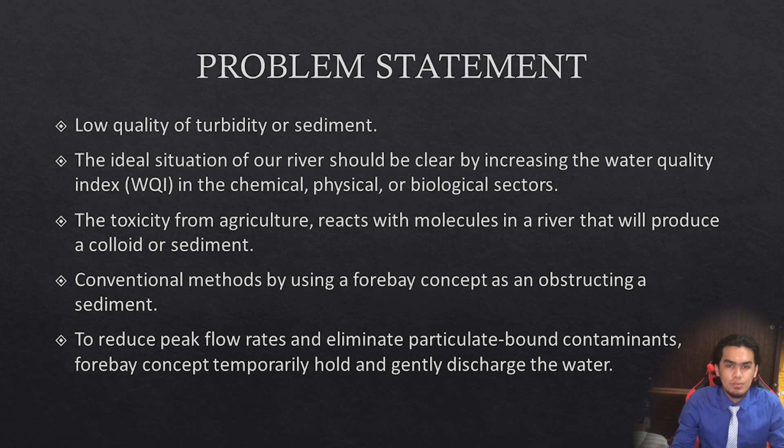To reduce peak flow rates and eliminate particulate-bound contaminants, the Forebay concept temporarily holds and gently discharges the water, which has a permanent pool of water to promote sedimentation and provides additional storage capacity above the permanent pool to detain and slowly release stormwater runoff, thereby mitigating peak flow rates.

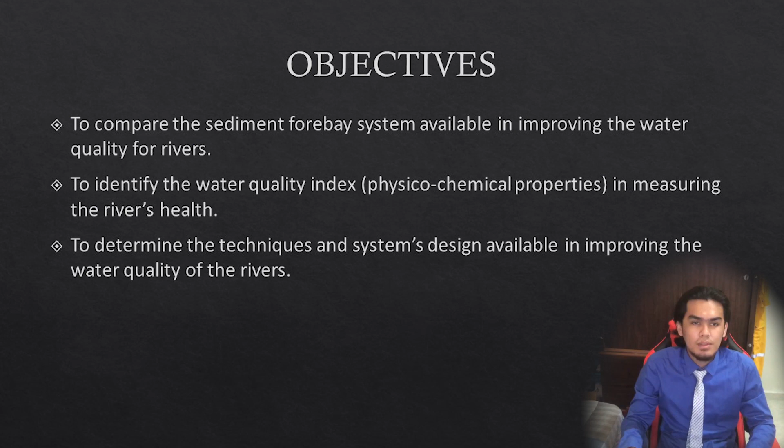There are three objectives in the study, which are to compare the sediment Forebay systems available in improving the water quality for rivers, to identify the water quality index physico-chemical properties in measuring the river's health, and lastly, to determine the techniques and system designs available in improving the water quality of the rivers.

The research questions of this study are how the Forebay system works to improve water quality, what are the advantages and disadvantages of Forebay treatment, what techniques are used to determine water quality, what physico-chemical properties determine the water quality index, and lastly, what is the impact on the ecosystem due to low water quality.

Now, we continue to the literature review. For application of Forebay systems, a Forebay is a man-made waterway in front of a bigger body of water. Forebays serve a variety of purposes. For example, they are used in flood management to function as a backstop during floods or weather conditions, detaining water and discharging it into a bigger body of water in a controlled manner. Several Forebays are mainly utilized to provide a natural environment for plants and wildlife to offset the dam or reservoirs' environmental effect. The size of Forebays varies substantially depending on their location and use.

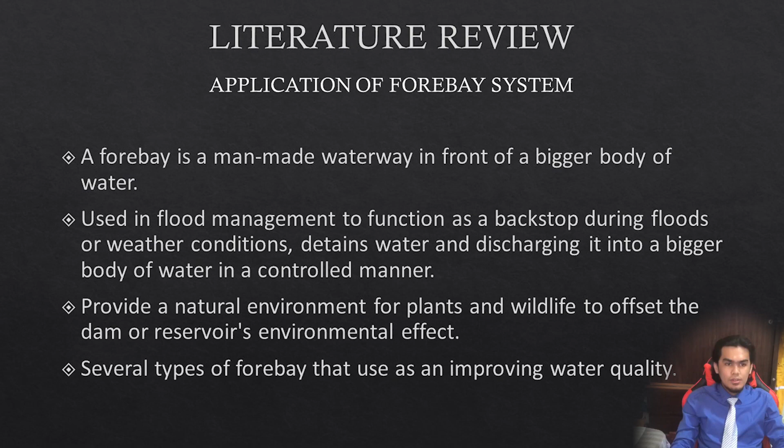In this review study, there are several types of Forebay used for improving water quality. Firstly is the wet retention pond. For several water pollutants, the effectiveness of urban wet retention ponds has been widely examined. To reduce peak flow rates and eliminate particulate-bound contaminants, wet retention ponds temporarily hold and gently discharge rainwater.

Wet retention pond, on the other hand, with sandy underlying soils, may give extra advantages via infiltration, recharging groundwater and maintaining stream baseflow. It contains a permanent water pool to promote sedimentation and extra storage capacity above the permanent pool to hold and gently release stormwater runoff, hence reducing peak flow rates.

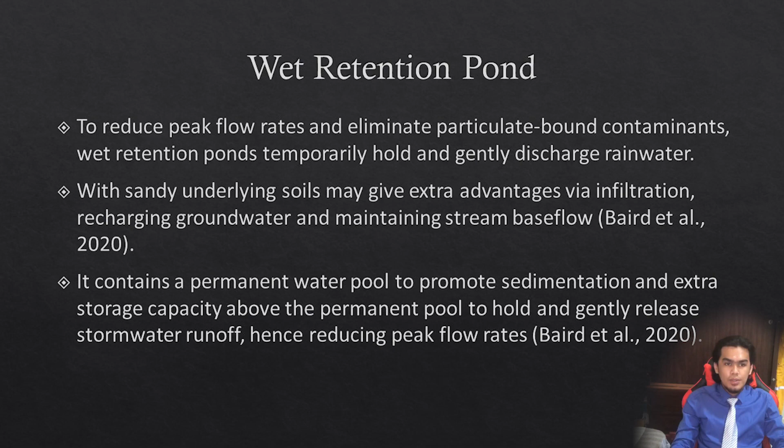The efficiency of sedimentation is determined by the particle size distribution of the influent. Sand is trapped, but clay and fine silts are often suspended in the water column. Second is Forebay and micropool. In this figure, a sediment forebay is a tiny hardened basin at the entry of the detention basin. A forebay is used to distribute input into a shallow, broad bay that is generally surrounded by a riprap or a concrete embankment.

A forebay is a stormwater pre-treatment structure that is designed to settle down heavy or coarse particles. The regular maintenance work in the micropool may be greatly reduced with a forebay. To eliminate the sediment accumulation, a forebay requires seasonal cleanup operation. A floor pipe or a vertical wall slot may be used to provide the low flow exit.

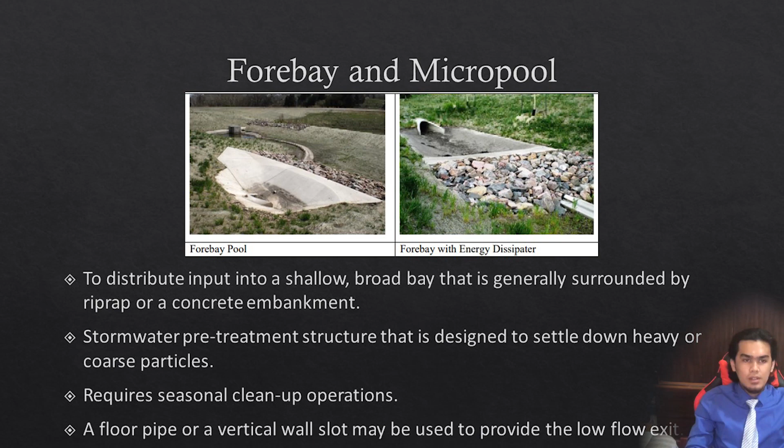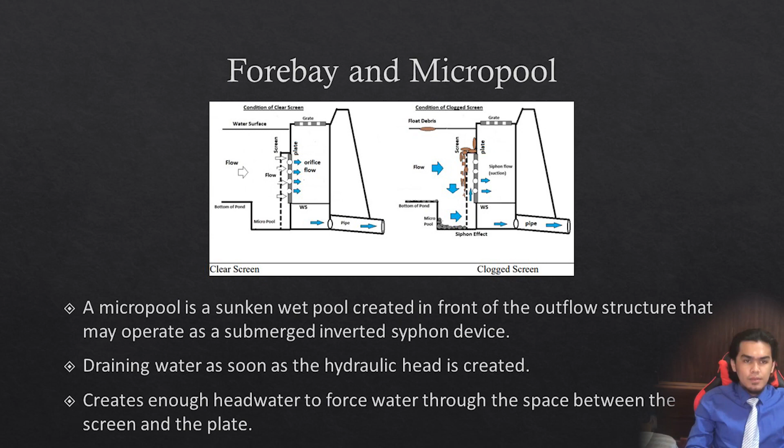A micropool is a sunken wet pool created in front of the outflow structure that may operate as a submerged inverted siphon device. As illustrated in this figure, due to the clogging around the outlet structure, it continuously drains water as soon as the hydraulic head is created. Standing water in the basin creates enough headwater to force water through the space between the screen and the plate. The siphon flow will continue until the basin is completely empty.

The third is floating treatment wetland. Floating treatment wetland systems are specially engineered devices that mimic the water treatment processes that occur naturally on and around floating vegetated islands, by contributing water treatment processes such as adhesion, filtration, nutrient absorption, direct use by plants, and sequestration. Floating treatment wetland may help to enhance the water quality of water storage ponds.

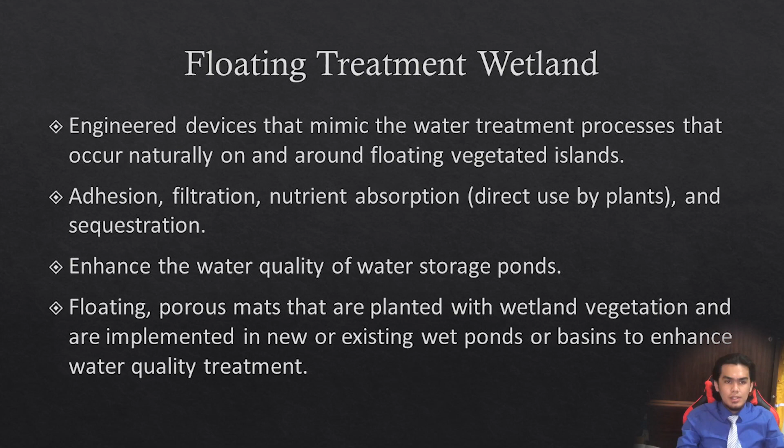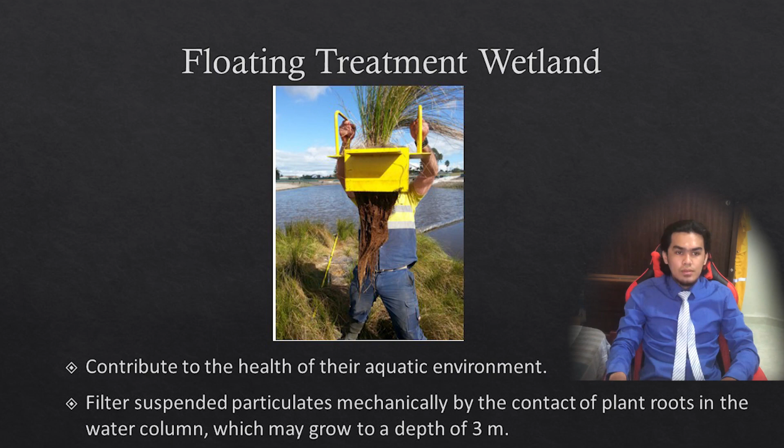This system consists of floating porous mats that are planted with wetland vegetation and are implemented in new or existing wet ponds or basins to enhance water quality treatment. By decreasing flow velocity and promoting the settling of suspended materials, floating treatment wetlands contribute to the health of their aquatic environments. Floating treatment wetland also filters suspended particulates mechanically by the contact of plant roots in the water column, which may grow to a depth of 3 meters as seen in this figure.

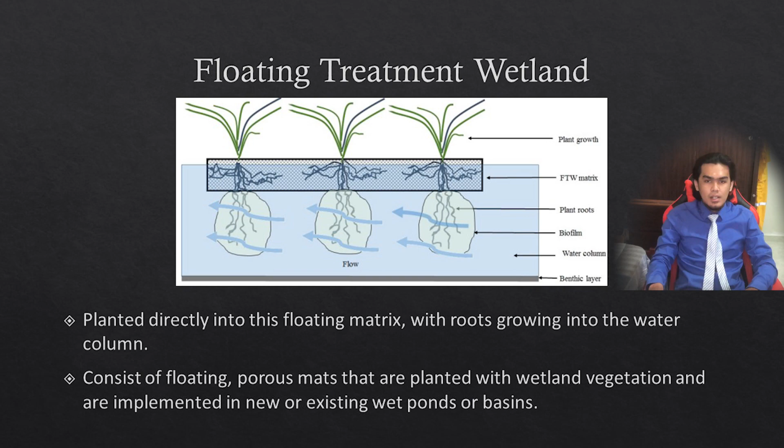This figure shows how young plants are planted directly into these floating matrix, with roots growing into the water column. These systems consist of floating porous mats that are planted with wetland vegetation and are implemented in new or existing wet ponds or basins to enhance water quality treatment. In outcome of Forebay treatment process in wet retention pond.

Wet pond performance may be predicted by the proportion of surface area to drainage area, with 1 to 2% suggested to fulfill water quality requirements. This method discovered that young ponds remove more contaminants than older ponds, suggesting that dredging and other maintenance may be required to guarantee long-term functioning. Based on the research by Senduran 2018, the method has some effectiveness in reducing total suspended solid, certain heavy metal, and total phosphorus all at the same time.

Total suspended solid is removed from conventional wetland system by settling, filtration, and adsorption, as well as other organic material and nutrients linked with it via processes such as mineralization, metabolization. Hence, the total removal efficiency of the system is almost similar.

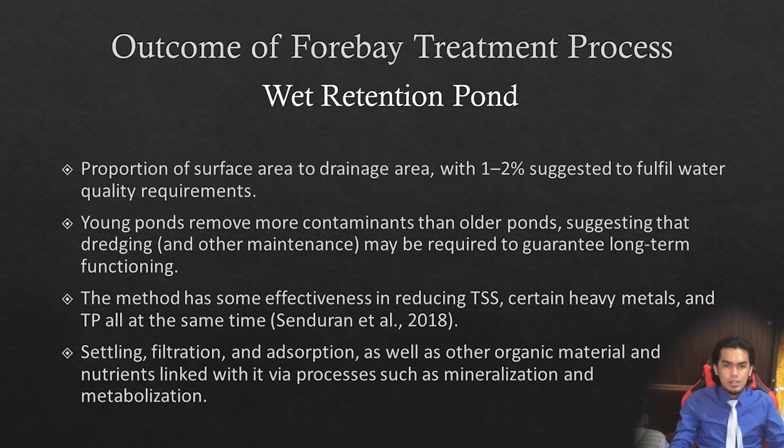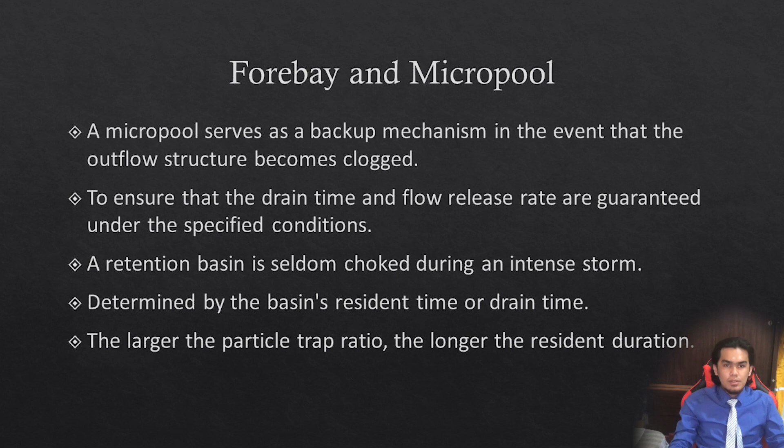In Forebay and micropool, a micropool serves as a backup mechanism in the event that the outflow structure becomes clogged. The micropool's principal function is to ensure that the drain time and flow release rate are guaranteed under the specified conditions. Because of this large flow volume and scattered debris loads, a retention basin is seldom clogged during an intense storm. The success of trapping solid settlement in the Forebay and micropool is determined by the basin's residence time or drain time. In general, the larger the particle trap ratio, the longer the residence duration.

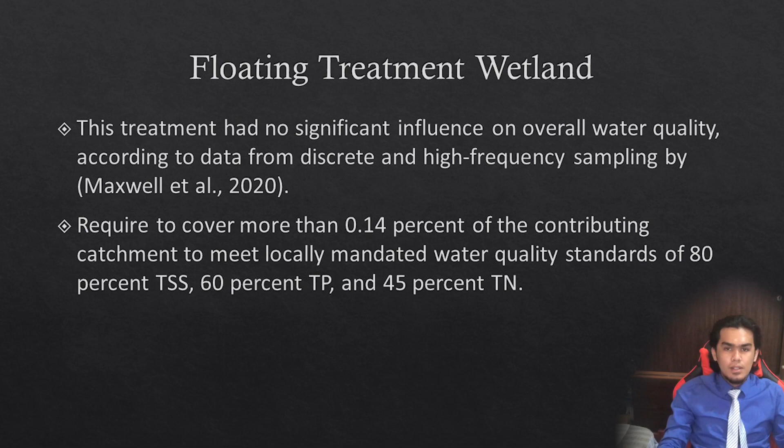For floating treatment wetland, this treatment had no significant influence on overall water quality according to data from discrete and high-frequency sampling. Floating treatment wetlands are a successful treatment method for removing pollutants from urban stormwater runoff, but they may require to cover more than 0.14% of the contributing catchment to meet locally mandated water quality standard of 80% total suspended solid, 60% of total phosphorus, and 45% of total nitrogen.

Now, I would like to discuss the types of parameters to indicate water quality. Water quality is a set of guidelines that outlines the biological, chemical, and physical characteristics of water in relation to its intended use. As a result, water quality assessment may be defined as a study of the biological, chemical, and physical properties of water in terms of its natural quality, human health, and implication and intended application.

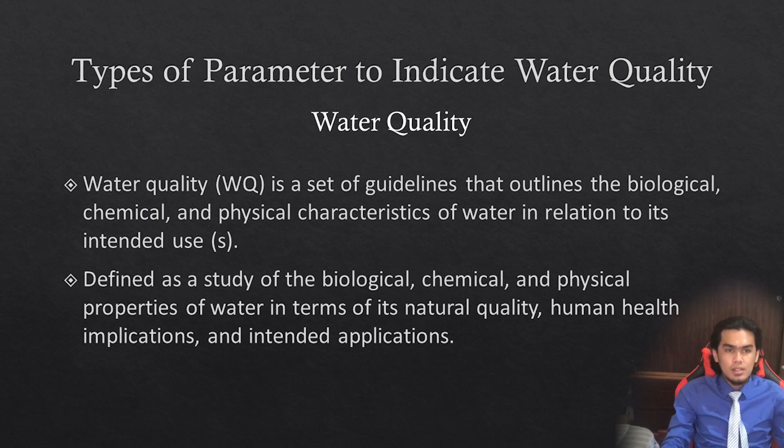Biological agents include toxins, waterborne infection, algae, and bacteria. One of the parameters in biological is fecal coliform. Fecal indicator bacteria including E. coli, coliforms, and enterococci are routinely employed to determine microbial contamination. Fecal coliform is a kind of FIB that has been used in microbial contamination risk assessments in water.

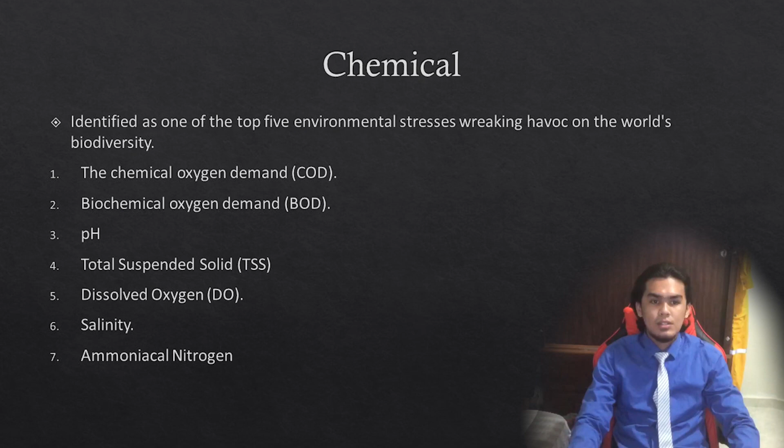In chemicals, human activities are regarded to be the primary source of chemical contamination. Chemical pollution has been identified as one of the top 5 environmental stresses wreaking havoc on the world's biodiversity. The chemical parameters that need to be identified are chemical oxygen demand, biological oxygen demand, pH, total suspended solids, dissolved oxygen, salinity, and ammoniacal nitrogen.

Lastly, physical pollution is defined as the introduction of waste items into the environment, and also certain physical characteristics. The physical parameters that need to be identified are temperature and turbidity.

Next, water quality standard for river water. The Department of Environment (DOE) assesses the river water quality using the Water Quality Index and the National Water Quality Standards for Malaysia. The DOE's Water Quality Index has been used in Malaysia for nearly 25 years as a foundation for assessing water quality in the environment, while the NWQS assesses the beneficial uses of water courses based on WQI.

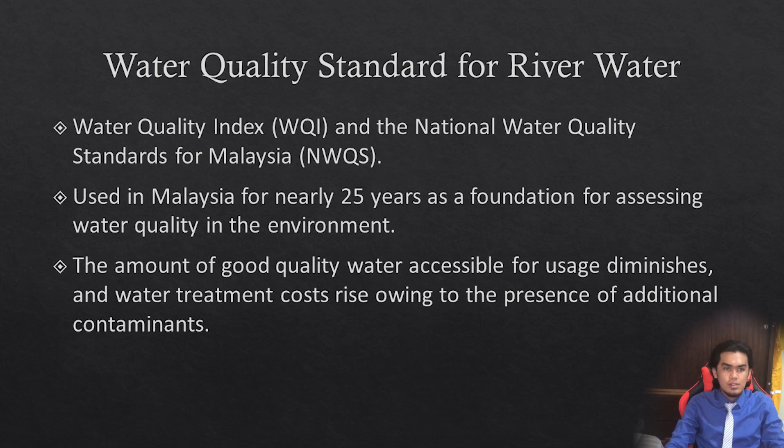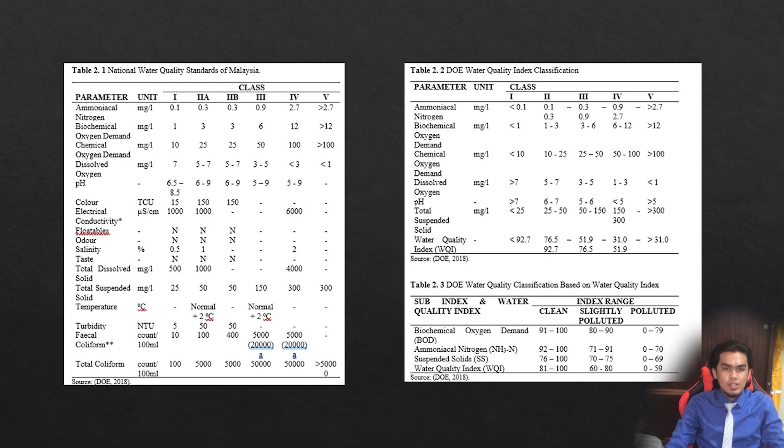The last point in the literature review, negative effects of water pollution. Fresh water is a vital natural resource that is utilized for a variety of functions in our everyday lives, including drinking and development. Pollution levels rise, causing instability in our natural environment and harming both physical systems and biological things in the ecosystem.

In human health, water contamination is a major cause of waterborne infections across the globe, particularly in impoverished nations. Water pollution poses a number of health hazards, including cancer, diarrheal illness, respiratory disease, neurological dysfunctions, and cardiovascular disease. When pregnant women are exposed to toxins in polluted water, they are at increased risk, increasing the likelihood of low birth weight. Drinking polluted water may lead to infection and illnesses like typhoid fever and cholera.

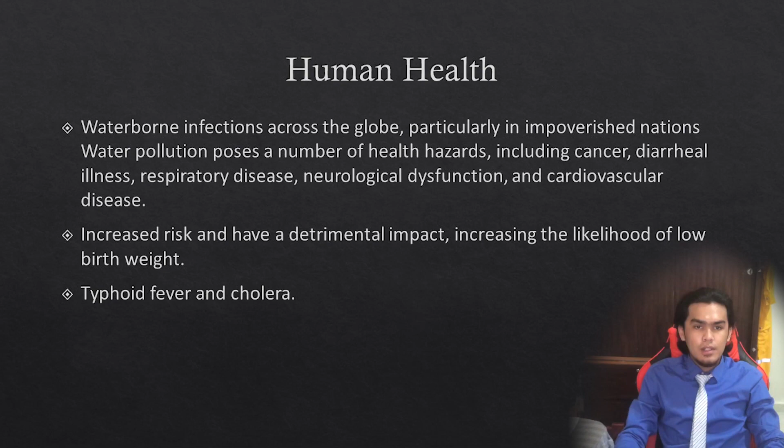In aquatic life, as soon as organic pollution gets into contact with water bodies, it causes deoxygenation and a lack of light, resulting in a decline or even purge of algae. Deoxygenation reduces light level, raises TSS, and settles debris, resulting in the decline or extinction of aquatic organisms that are most vulnerable to pollution. Total suspended sediment has a negative influence on algae and aquatic macrophytes because it reduces the amount of light that reaches the water column, lowering the frequency of photosynthesis.

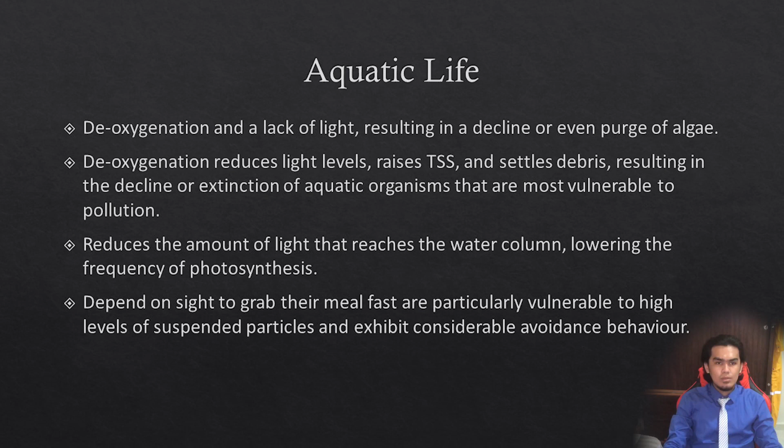Perch, brown trout, and other fish species that depend on sight to grab their meal are particularly vulnerable to high levels of suspended particles and exhibit considerable avoidance behavior.

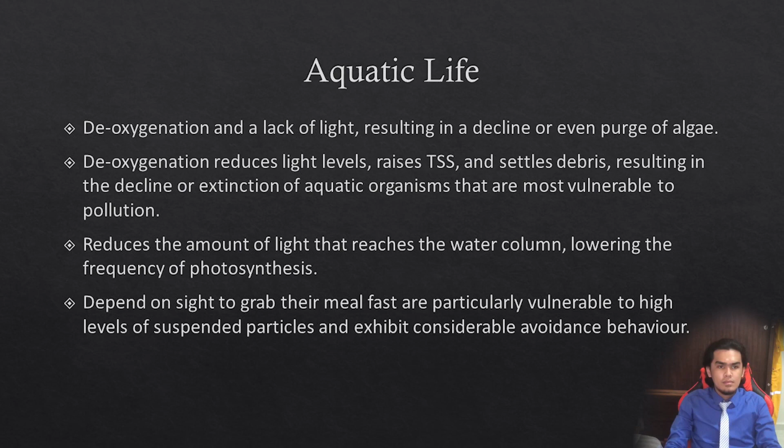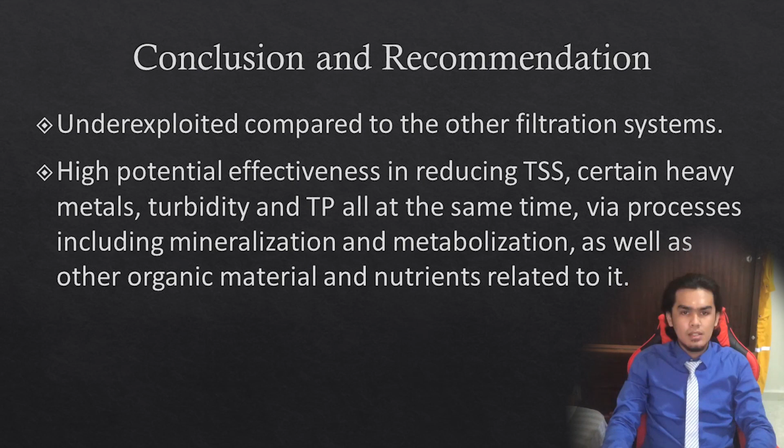In conclusion and recommendation, the sediment forebay system was underexploited compared to the other filtration systems in terms of biological potential such as antibacterial properties and antioxidants. The analysis review of sediment forebay systems proved that the systems have high potential effectiveness in reducing TSS, certain heavy metals, turbidity, and TP all at the same time via processes including mineralization and metabolization, as well as other organic material and nutrients related to it.